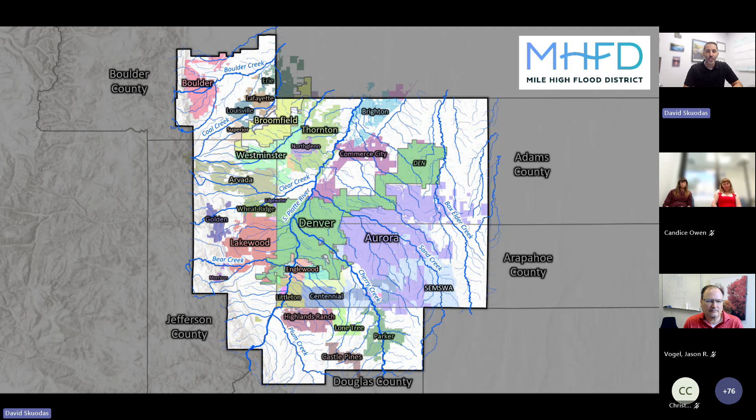A little more geography. The mountains limit urbanization to the west, but we have lots of land left to potentially urbanize in the east if we can find enough drinking water, which is not a certainty. We have some older parts of town too, areas built before we started planning around flood risk in the 1970s. So it's an interesting mixture of older at-risk neighborhoods, total greenfield development, and then everything in between. So that's who we are and where we are.

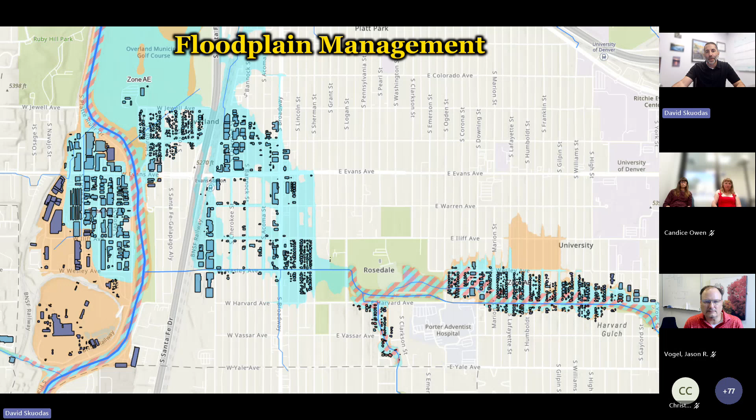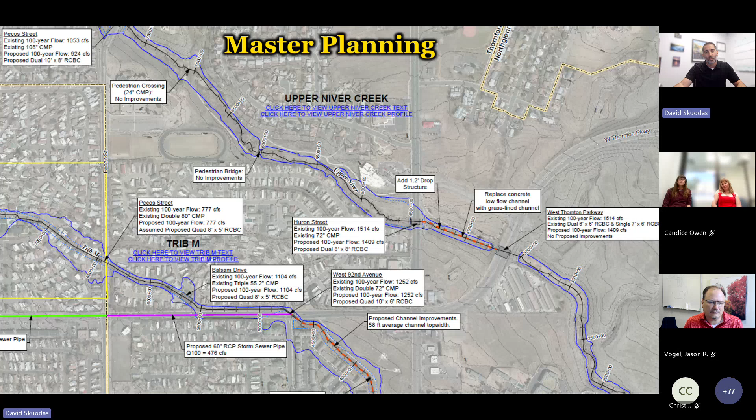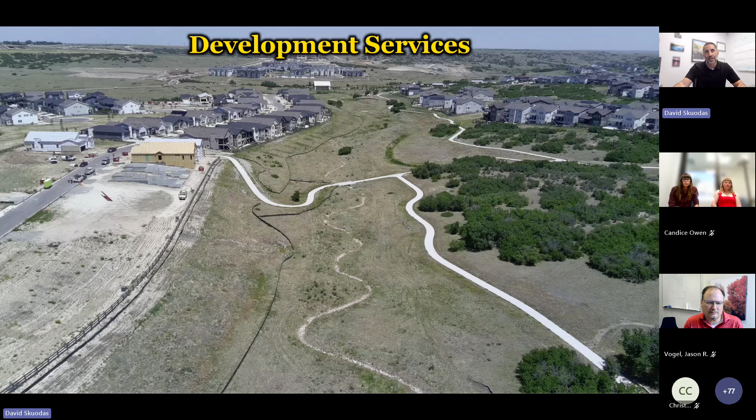I'll also describe our services. With floodplain management, we identify and communicate flood risk. We have what's called a cooperating technical partnership with FEMA that gives us local management of changes to floodplain maps. So we identify the risk, but then we need to know what can be done about it. With master planning, we study streams and watersheds to identify system-wide goals and potential improvements so that as both public and private projects get built, we know how it all works together. With development services, land development still builds more new waterway infrastructure than we do. So we play a big role in working with local government partners to preserve stream corridors and ensure that private dollars are building quality infrastructure that taxpayers will inherit. Capital improvements, this is where we fund, design, and build public infrastructure projects, typically for flood mitigation or stream restoration.

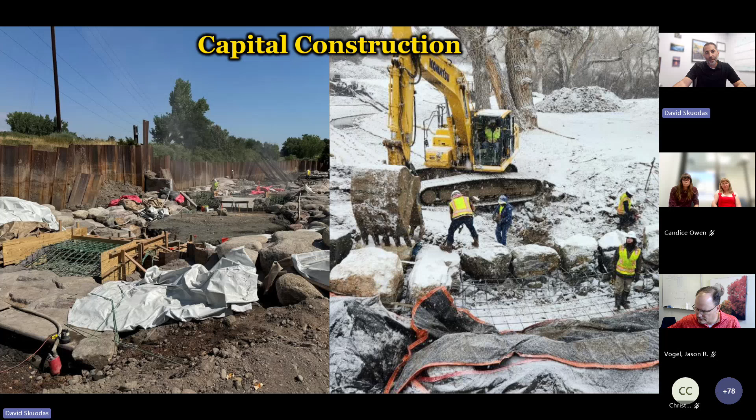Every project we build is in partnership with the local government. So we generally let them set the priorities, but we require that they fund at least 50% of the cost. Stream management is where we maintain and manage functionality of our systems on a yearly basis, including vegetation management, infrastructure repairs, and preserving flood carrying capacity. We do fund this work at 100%.

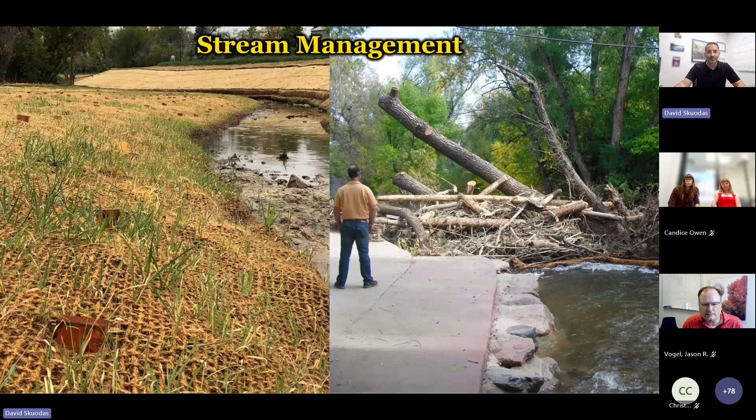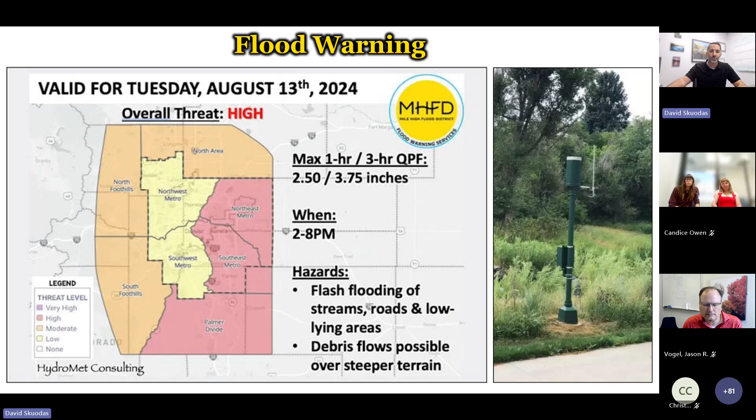We also purchase flood-prone properties in high-risk areas from willing sellers. We probably do around 3 or 4 of these per year. Flood warning includes daily forecasting and a network of rain and stream gauges to equip emergency managers with real-time information. So that green pipe on the right has a tipping bucket rain gauge at the top and then a flow gauge in the stream nearby, and it's all connected to a cellular network.

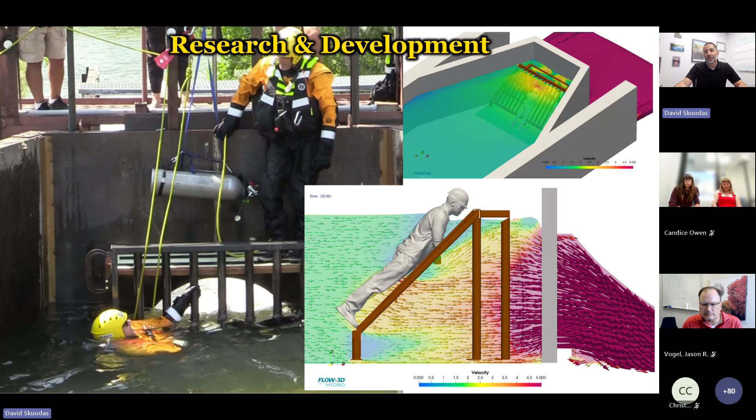With research and development, we create engineering criteria, tools, techniques, and standards for the industry. Here you're looking at research and testing related to safety grates that Holly will share more about later. Education and outreach. Here, our goal is to elevate our fellow industry professionals and inform the public and policymakers.

Now, when it comes to results we've been able to achieve, one of the ways I like to describe that is that our impact makes the community safer, healthier, and more livable. So let me give you a few examples, starting with safety. Now, Westerly Creek in Denver has an interesting history. This photo shows an engineered channel that used to sit under the runways of the old Stapleton Airport.

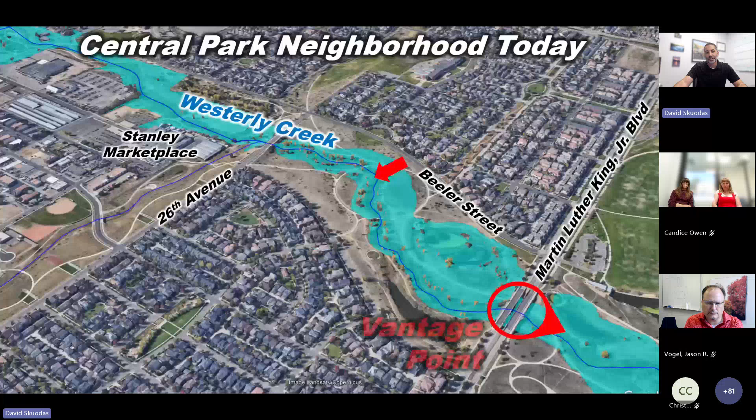As the area redeveloped, space was preserved for flood flows to spread out. So resilience was largely achieved with the design here with healthy vegetation and buried riprap. I like to call this infrastructure that looks like nature. Now, this used to be buried under a runway. Now I'm going to show you a series of photos taken from this bridge. Here you can see the photo vantage point a little better. That ped bridge in the distance will show up in all these photos.

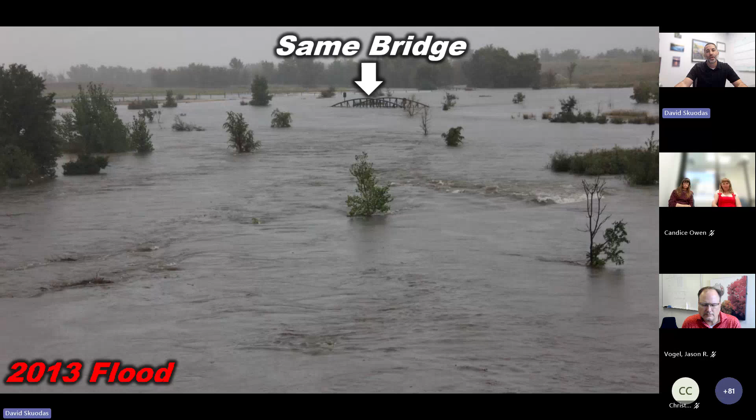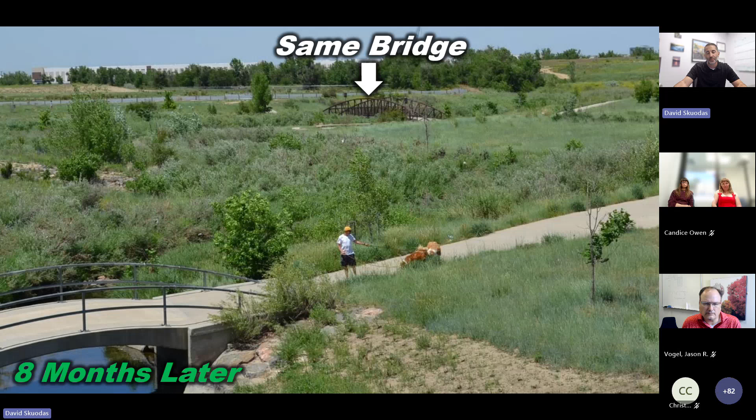So here's an initial photo on a sunny day. And here is the exact same view at the height of the 2013 flood when we had 100-year flows from 16 inches of rain. This photo was taken the very next day, and then back to the first photo, which was actually taken 8 months post-flood. So after a 100-year flood, there was literally nothing to fix here, and I think this demonstrates one of the ways we've made the community safer.

We also make the community healthier in a number of different ways through ecology, recreation, shade, access to nature, but I'll share a quick water quality story. We're not an MS4, but with our research and development group, we provide resources to help our MS4 partners. Candice will share some examples later. But sometimes the most impact you can have on water quality is in the receiving stream rather than in the watershed. And here we're looking at a restoration project on Cherry Creek.

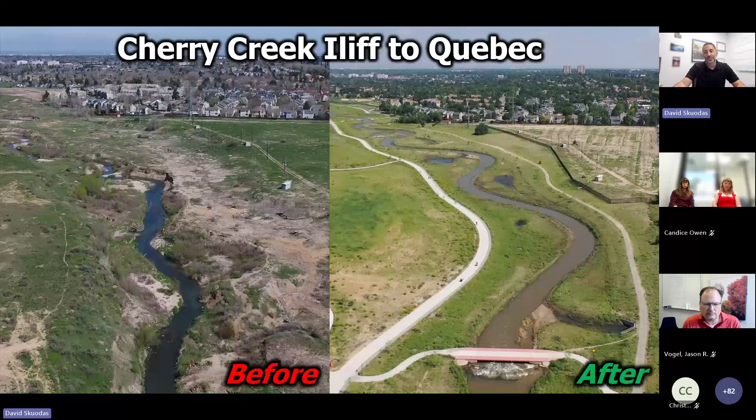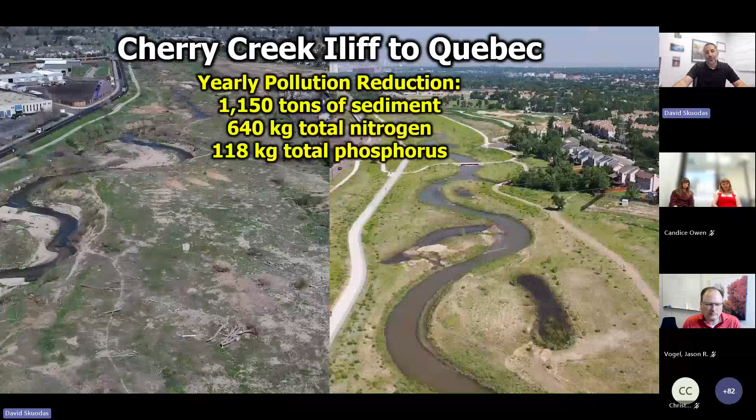This project was studied to quantify how much the stream restoration reduces pollution. So prior to the project, the stream was eroding like crazy and sending all sorts of sediment and pollutants downstream through the system. And this shows the list of contaminants that no longer make their way downstream on a yearly basis because of this restoration. So this is an example of one of the ways we make the community healthier.

So we take a lot of pride in creating projects that allow many functions to occupy the same space because it creates lasting benefits, both for the community and the environment. And we found it's possible to accomplish this layering of goals even at the end of a pipe outfall like this one, where we ran the daily flows through a series of constructed planters to have a cleansing effect on the water and also to serve as an amenity for trail users to stop and look at. And yes, it can handle a major flood really well, which we had to plan for also.

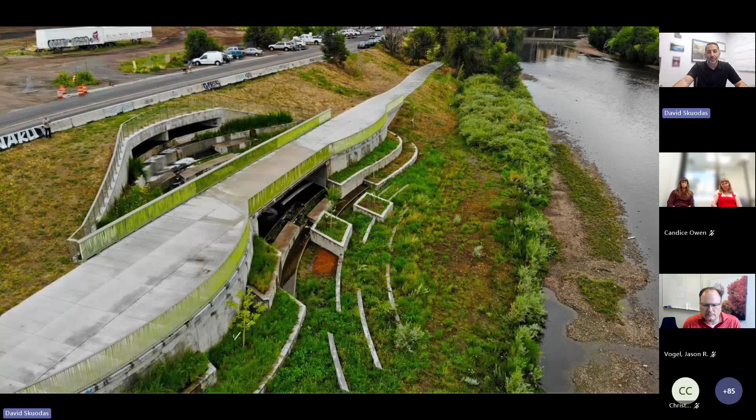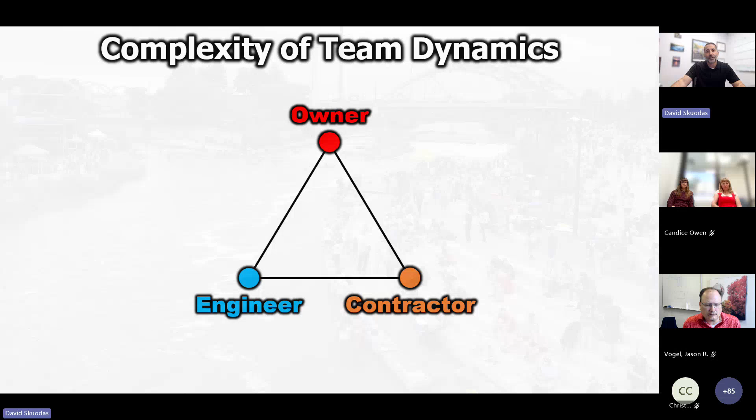This costs perhaps 10 to 20% more than a traditional outfall would have cost, but I think we would say it's definitely worth it. Now, projects like this one were created pretty much by an owner, an engineer, and a contractor working together. But when we expand our idea of what's possible and start thinking about placemaking and community values, habitat, recreation, the team gets more complicated. And this graphic is showing you how complicated just the project team can get. So we've done a few things over time to help us navigate that complexity. And one of those is the urban stream framework.

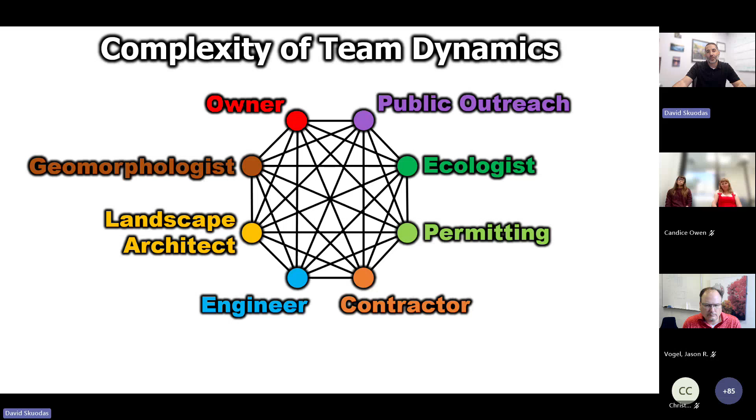So flood protection is largely driven by hydrology and hydraulics. These are foundational, but I think of them as the black and white aspects of our work. Not necessarily easy, but they're quantifiable and mathematical in ways that we're used to. So upon this black and white foundation, we also consider these other elements of urban stream function. We call these the 5 elements. So if H and H are black and white, then the other elements bring color. It's the browns, the greens, all the other colors of the rainbow. This combination takes projects from good to great. It makes them community treasures and not just utilities.

So when we're talking about multifunction, these elements are where we start, and then we balance them with capital and life cycle costs and the context we're working in. We don't consider any of these as nice to have. We feel responsible for finding the optimal combination for a given project.

And I don't have time to get into much detail, but we take the 5 elements, lay out common performance indicators, and then within each of these, we look at a wide array of quantifiable metrics to define how much value, how much function we might gain per dollar invested for alternatives we're considering. We come up with a project-specific constellation of success metrics to measure different versions of the same project against itself. So this helps us understand value in addition to flood protection and clean water. So our goal shouldn't be to build the cheapest projects possible. We're looking for that sweet spot between cost and value.

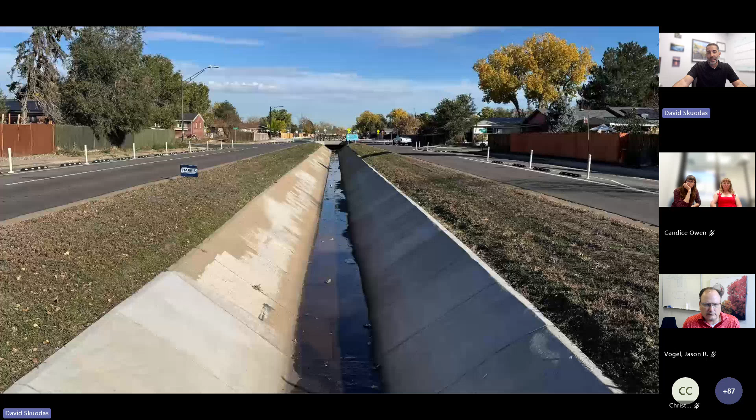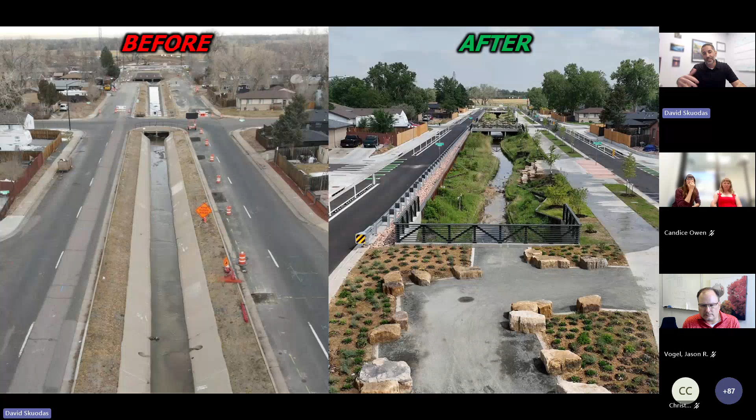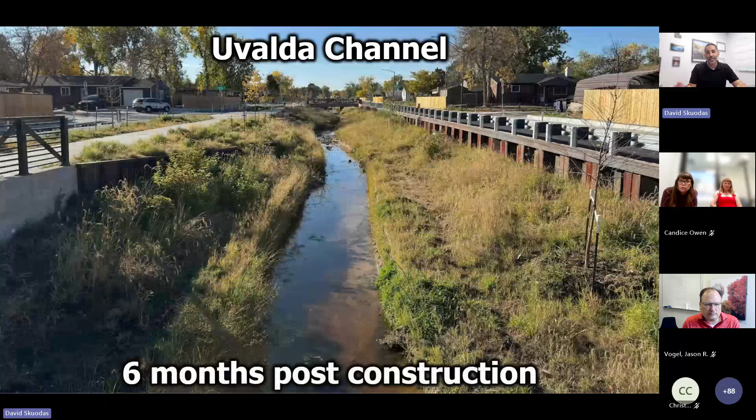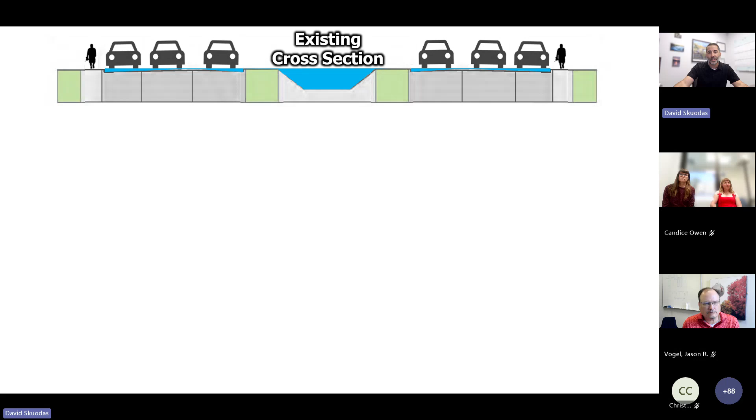This project was impacting a polygon of public land. There were many different choices about how we could reallocate that public space. The existing road section was very focused on cars, not much room for hydraulics, pedestrians, or cyclists. No habitat, no shade, and this shows it diagrammed in cross-section. So how can we make better use of the land we have to work with? So using the street to carry riverine flow was a non-starter because of the stranded car we saw earlier, so that gave us a starting point.

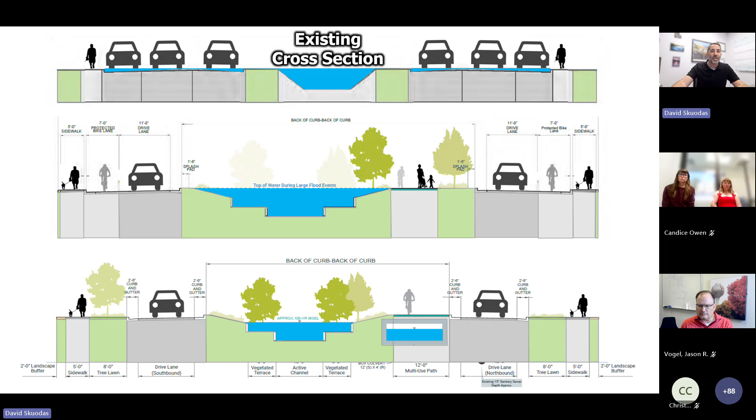Here were the 2 cross-section alternatives we narrowed it down to from 16 we considered. We compared the functional performance for each of these functions like hydraulics and ecology, pedestrians, bikes, moving cars, parked cars, tree canopy. The bottom option puts some of the major conveyance underground. So the costs were similar, so we chose the middle option. This excerpt shows a high-level depiction of the candy buttons we used to compare different options we were choosing from.

There was extensive community engagement to get their input, so we included the public.

I got just about a minute or two and I'll be wrapping up.

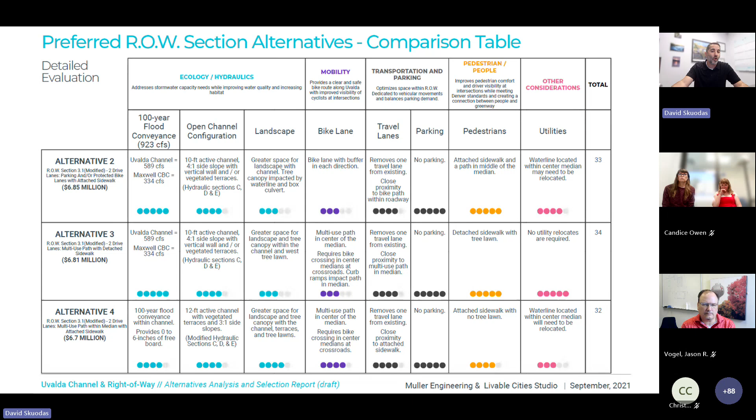A public space being great will be judged in the eyes of the public who live near it. So we want this outdoor space to feel like home to them. So that means they needed to feel like they were part of the process. So notice how conveyance was just one of several diverse variables we considered.

And the design project manager on this is a guy I admire greatly. And he said this project achieved the best balance of any project he'd ever worked on. And it was a balancing of value. Now, bringing a multidisciplinary group of people together to figure out a project like this was really challenging. It's very messy. It's very human.

So a couple of programs we've invested in include a stream management academy and a construction management academy. With the Stream Management Academy, this is a cohort-based program that brings a diverse group of industry professionals together to learn about the urban stream framework. But this is not just a stream restoration course.

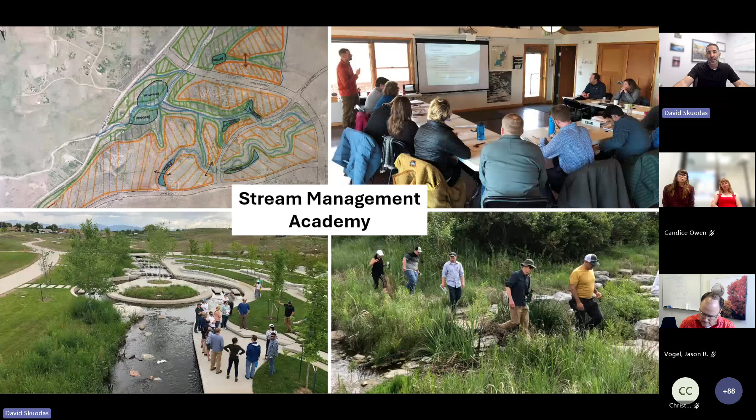It gets beyond that to help professionals understand relationships between watersheds, urban growth, infrastructure, ecology, and community priorities so they can make better decisions across the entire watershed, regardless of their role. The 5 elements form the basis of class material. The academy is fully in person and meets 6 times, with half the sessions in the classroom and the other half out in the field.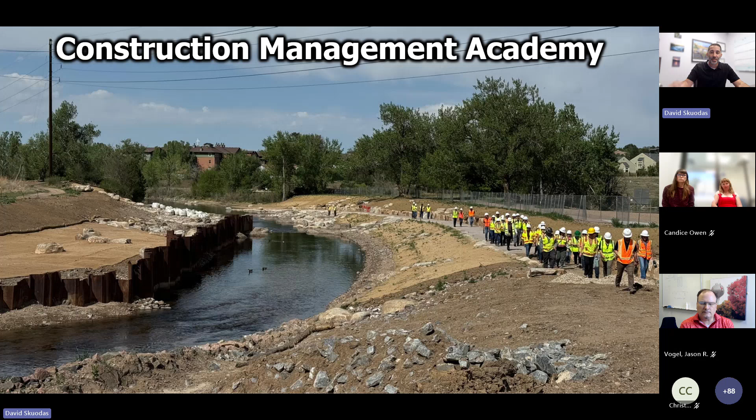With the Construction Management Academy, this provides more one-off field experiences for designers, inspectors, and project managers to introduce them to waterway-specific construction materials and techniques. Sometimes it involves construction site visits like you see here. We also create hands-on opportunities where we can. One example is with void fill riprap, which is on the right image here.

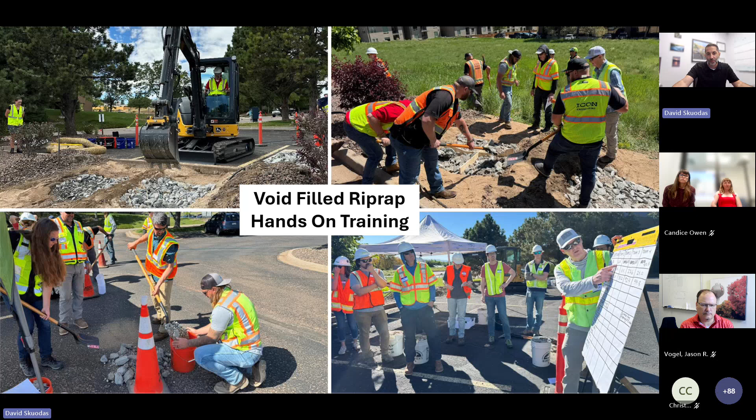I bring this one up because it's hugely beneficial in helping us create solutions that work better with nature. But it's really finicky because all the materials that get brought to the site are very inconsistent. So we created a scaled down version where the students mix and place the material by hand so they experience what can be challenging about void fill riprap. It takes a lot of field judgment.

It was very popular. And then we also produce educational construction videos that get posted to our YouTube page, which you see here. Our riprap video is our most popular. It's been viewed about 75,000 times. So that's a little bit about the Mile High Flood District, our services, and some of our educational offerings.

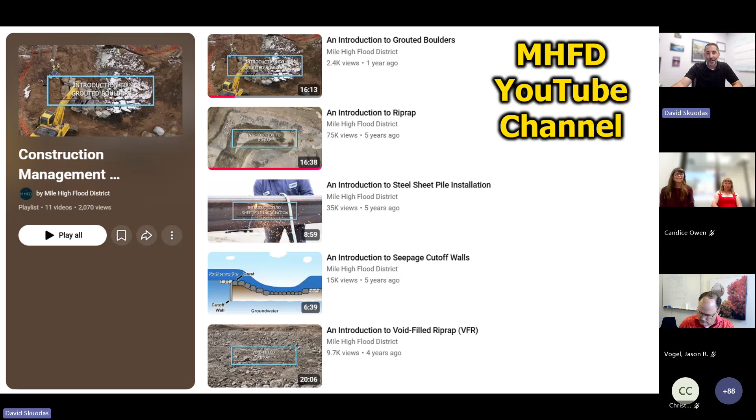I'm going to flip this over to Holly now. We're going to play a little musical chairs. It's here. Okay, you should get.

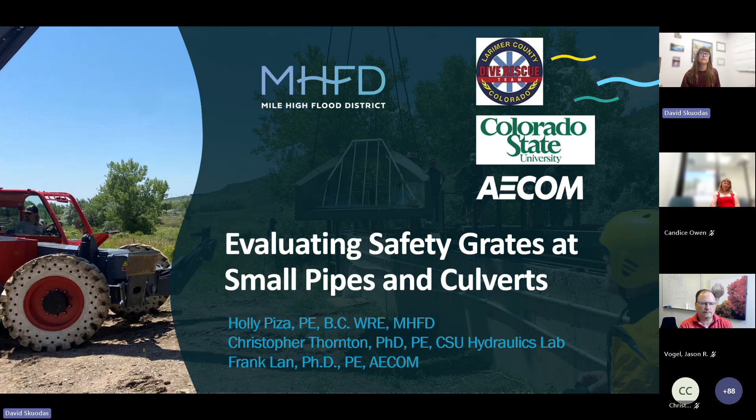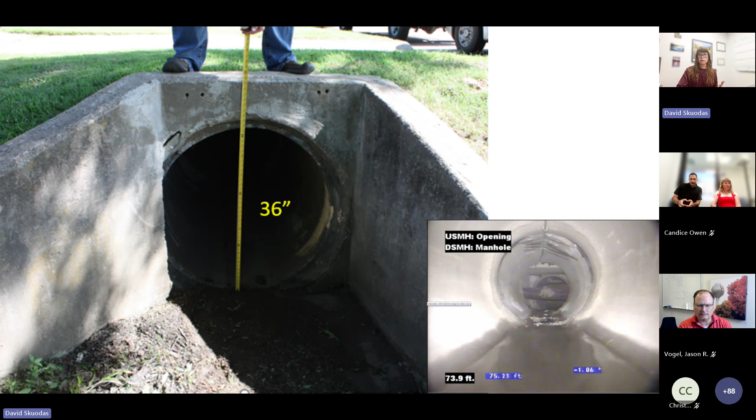Unfortunately, it was a long culvert with a utility cut through the pipe, which is not uncommon. And someone lost their life here. And so these are some of the dangers that we have in our watersheds on any given flooded day. ProPublica put some light on this a while back and said that we as government agencies have failed to take simple steps to prevent these tragedies from happening.

So the first part of this project was that we looked at 41 different incidents from the 90s to the 2020s. This was step one: identify the configurations and settings where people get hurt and how they get hurt.

Then we were able to partner with Colorado State, who built a physical model around this, so that once we know where to install them, we'd know how to design them.

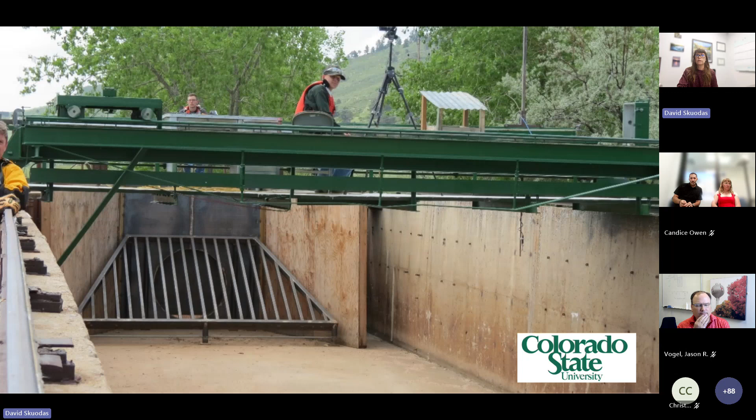We made lots of measurements in the Flume, looking at velocity at different points in the grate, before we partnered with the Larimer County Dive Rescue Team, who was excited to get in the water and give us qualitative data on what different flows felt like and what design configuration was easiest to navigate and self-rescue, or help someone rescue, which is the role they often have.

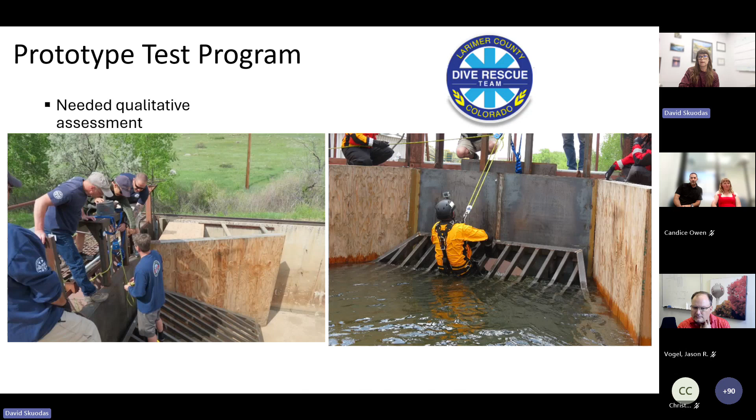The team was great. At one point they convinced me to get into the Flume to see what it felt like, and it felt too safe in this configuration. We hadn't found that threshold condition that made it too difficult to self-rescue.

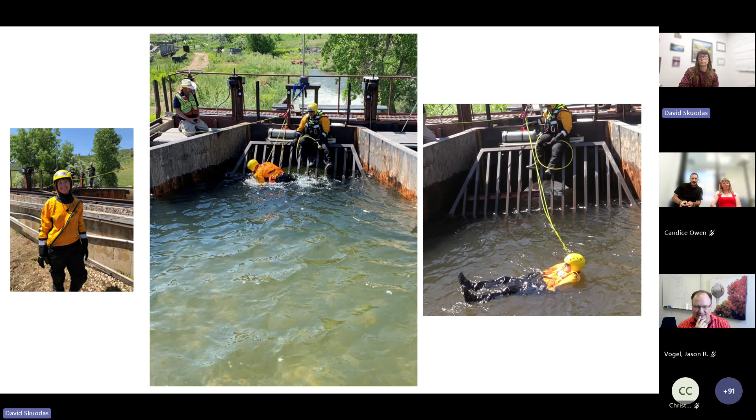So we changed it up, went to a vertical grate with an offset from the orifice, just to get the team closer to that suction force of the orifice of the culvert or pipe. We're looking for the force on a person that might pin them to the grate or suck them into a pipe if the grate wasn't there.

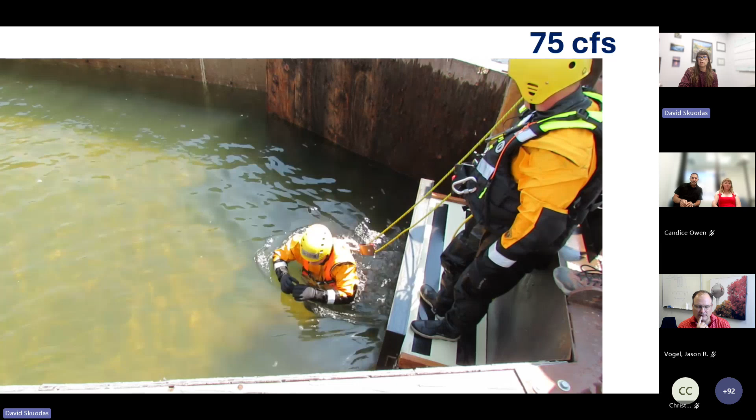So at 75 CFS in this configuration, you can see that our diver is able to walk in front of it and not lose his footing.

Turned it up to 90 CFS. He noted that there was a dramatic difference. He said, quote, 'It's hard, it's not easy for me.'

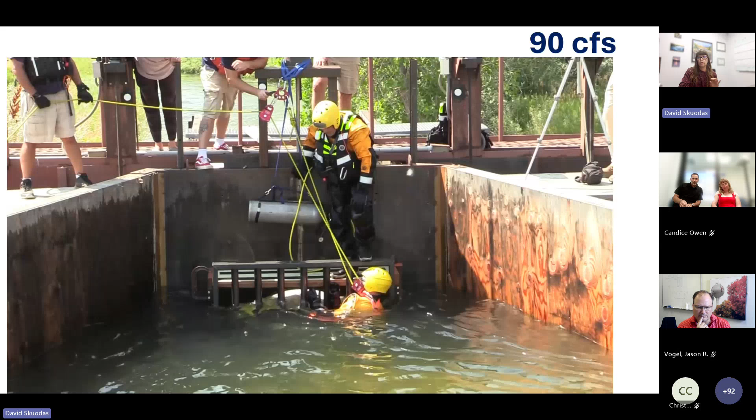So now we know that between these two conditions, we've crossed that threshold force on the diver, at which someone might become pinned, unable to self-rescue.

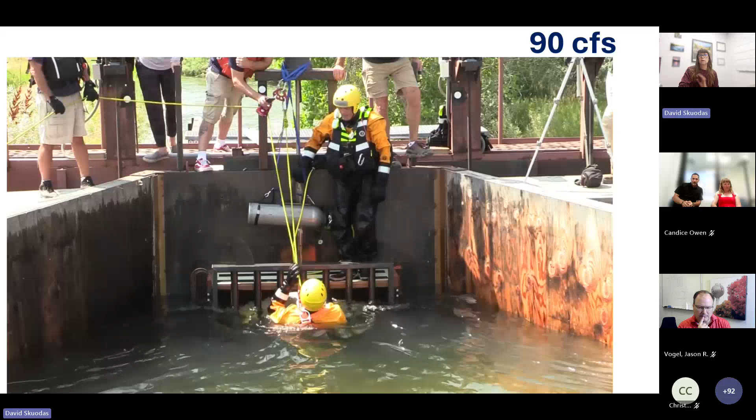Then we partnered with AECOM to recreate these conditions in a 3D CFD model. This would also later enable us to expand to more configurations that we weren't able to do in the physical model.

In the physical model, we looked at 2 different pipe sizes. In the 3D model, we were able to look at everything from 12 inches to 60.

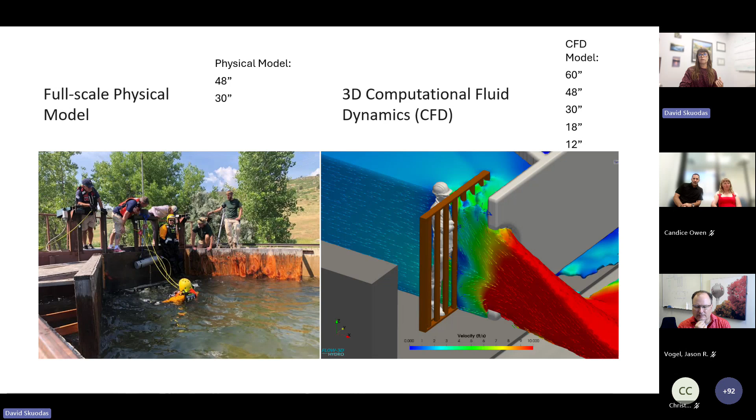We did some work to make sure we had agreement between the physical model and the 3D model, comparing measurements from both, and we were able to find agreement.

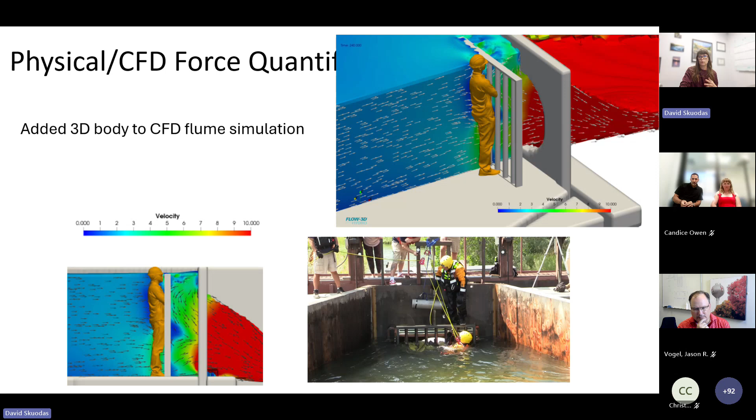Then we added a 3D person to the model to determine the force on that person for configurations we created in the Flume, specifically the force above and below the threshold force we found at those different configurations I showed you. So this is what it looked like.

At that 75 CFS, we had a force of 107 pounds. And at 90, we had a force of 142.

And given that this was a full-size man in the Flume, we wanted to be a little bit conservative, and we went with...

This was really a significant finding of our research: that 110 pounds of force is the threshold at which you may get pinned against a grate, not able to self-rescue, or you might get sucked into a pipe.

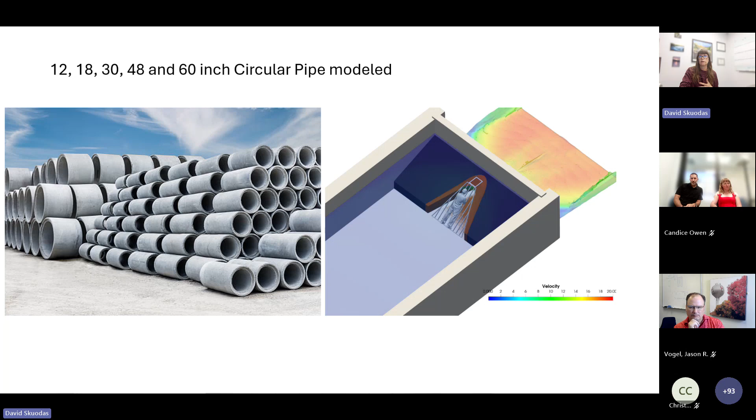So now we know the threshold force. We can use modeling to better understand different configurations. We added a child-sized dummy into the 3D model for smaller pipe sizes.

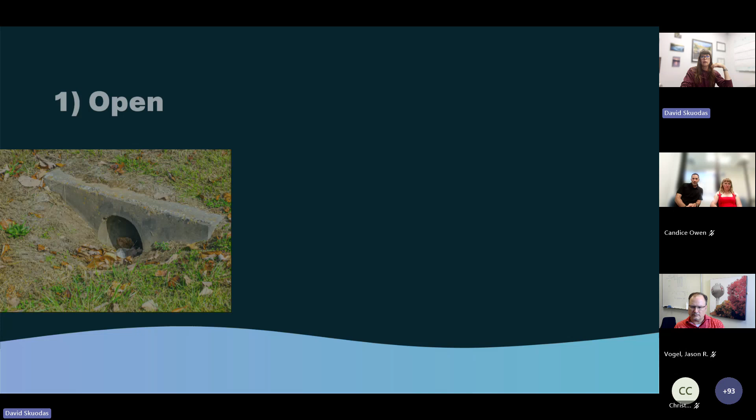Then we wanted to translate this to criteria, so we focused on 3 different common configurations. Number 1, open pipe — when do you not need a grate? Number 2, flared end section with an off-the-shelf grate. And number 3, a custom grate.

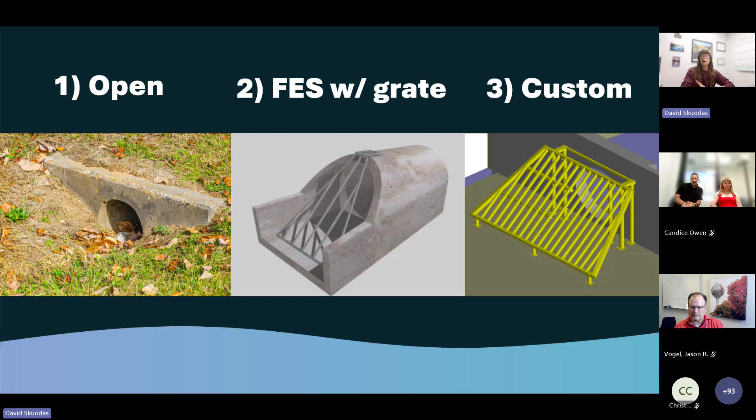Looking at the unprotected pipe configuration, that first configuration, we saw that discharges below 20 CFS didn't produce a force on a body more than that threshold force.

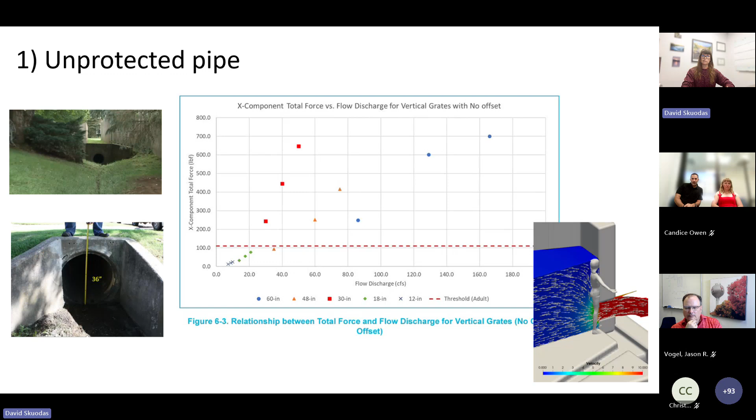But what if you've got really high headwater and you're restricting flow to 20 CFS? Maybe you're using the pipe to restrict flow and detain water upstream — that could be a very dangerous consideration.

Headwater over diameter is a typical parameter engineers consider. We don't typically have force, right? But we do this calculation.

In our criteria, we've always had additional requirements for pipe inlets when this exceeds 1.5. We say you need a headwall so that you don't have piping through the embankment. It's a threshold for other requirements.

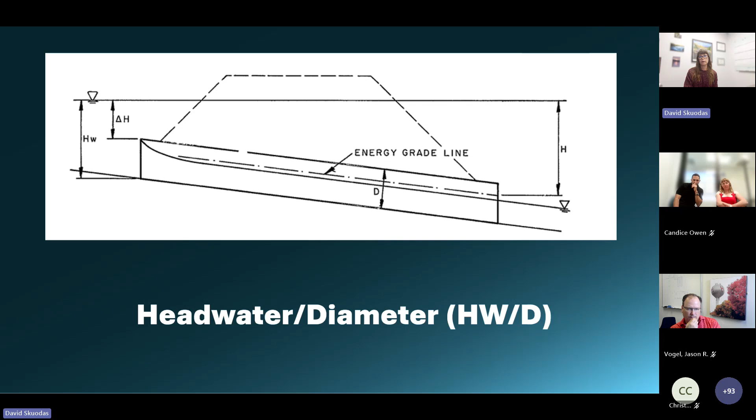And when we looked at that within this study, we found that this 1.5 value was also a good breaking point for evaluating safety grate design.

Okay, so let's look at that second configuration, the flared end section. For the larger pipes in this study, 48 inches and 60 inches, the threshold force was typically exceeded for this entrance configuration when discharge was more than 100 CFS.

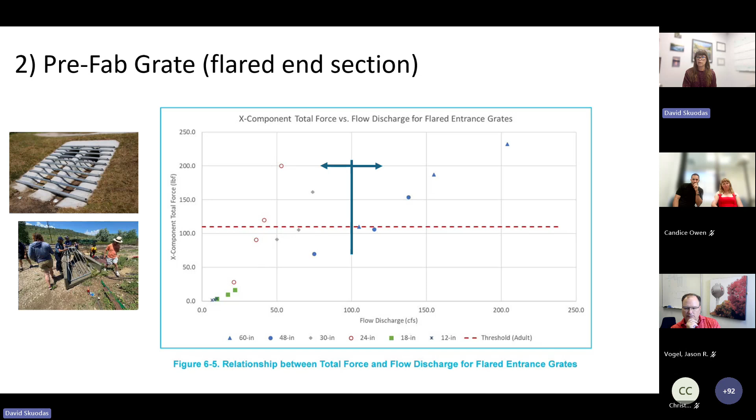For all pipe sizes below that, the threshold force can be exceeded when headwater over diameter exceeds a value of 1.5. This means that for typical flared-end section designs, a prefabricated grate will be sufficient for flows under 100 CFS and with that headwater over diameter under a value of 1.5.

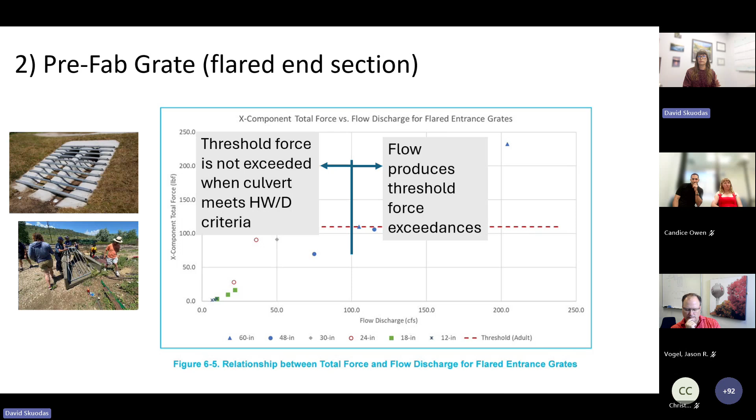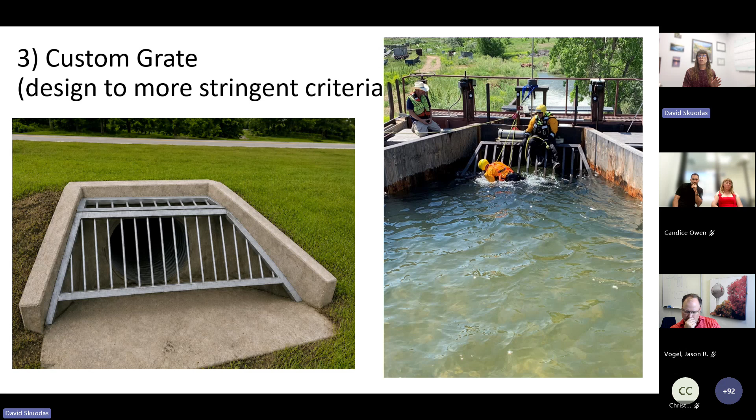And then that third configuration, the custom grate, when the design can't meet the conditions equivalent to the first two configurations, we found that the custom grate was always suitable for all other flow conditions tested up to 300 CFS.

This is just a summary slide showing the criteria we put into our manual. For those smaller uncovered grates, they're good as long as it's under 20 CFS and you're within the 1.5 headwater over diameter criteria. You can go to a flared end section with an off-the-shelf grate as long as you're within that 1.5 criteria and less than 100 CFS. Then between 100 CFS and 300, you can use the custom grate.

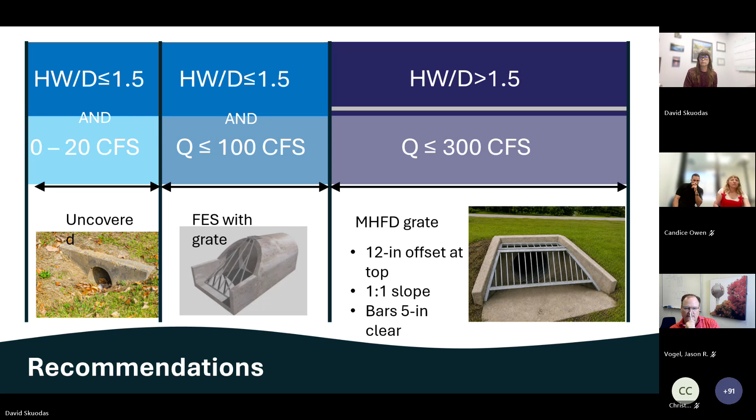And that criteria has been incorporated into our manual. It's volume 2. We also have a technical memorandum that we've published on our website, along with AECOM's report and Colorado State University's report.

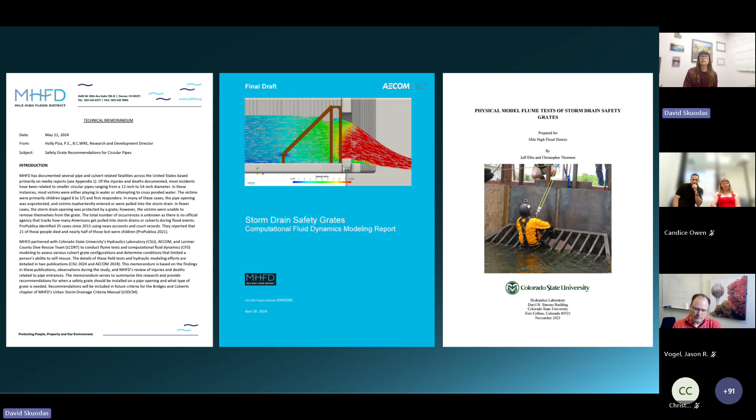We've done a couple of things with this, including work with some local students so that resident scientists can come in and provide information on where these are located, and we can address them. And that's a bit about that project.

And Candice has a couple more that she's going to highlight specific to stormwater quality. Thanks, Holly. Great. All right. Hi, folks.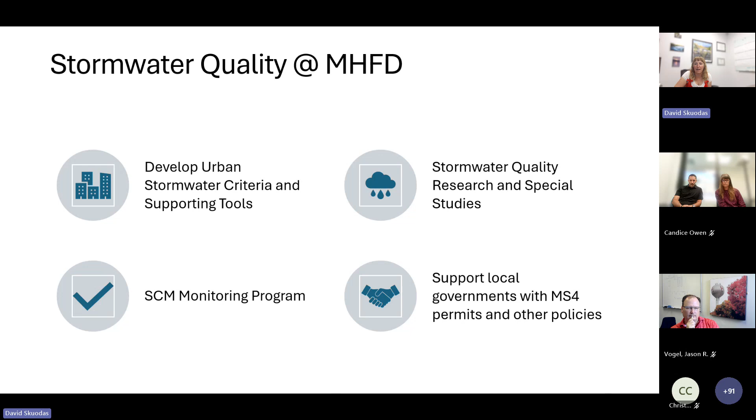Today, I'm going to be highlighting work of our stormwater quality program, and these are our main focus areas. We update criteria that Holly was just talking about. We have 3 volumes, and we develop tools to support that, including design workbooks and other types of software. We conduct various types of research and special studies, like the street sweeping study you're going to hear about. I'm also going to hit on our SCM monitoring program. And finally, we support our local governments with policy and regulatory issues, and we advocate and influence requirements and permits that are hopefully rooted in science and engineering.

So I'm going to jump into some specifics here, starting with our regional street sweeping study. This study first came up through conversations with our local governments and state regulators, and this bubbled up as a good research project ahead of Colorado's general Phase 2 MS4 permit update. Both of these next two efforts were done in collaboration with Jane Clary at Wright Water Engineers here in Denver, so a shout out to her.

Goals of this project: we wanted to allow our local governments to take credit for the street sweeping programs they're implementing. We also wanted to understand best practices that could be shared for better street sweeping programs. So we wanted to answer the question: how can we quantify and credit the nutrient reduction benefits of street sweeping in Colorado? And we developed this study.

We wanted it to be slightly iterative. So we wanted our literature review and local government understanding of what they were doing to inform our Phase 2 of field data collection and understanding the tool we wanted to develop. We knew we wanted a calculator tool to quantify, and we just needed to determine if we needed something new or could reuse and piggyback off of great existing research being done nationally. So we did that, and right now we're in Phase 3 trying to finalize the tool and the report.

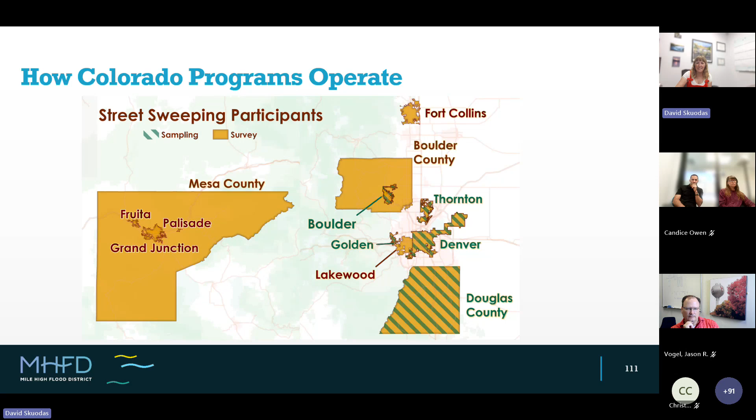All jurisdictions do spring street sweeping primarily to remove winter sanding materials from snow. Nearly all had dedicated fall sweeping or leaf management activities to get that up before winter came. Most programs track collected materials by volume, such as cubic yards, rather than by weight. Curb miles swept were attractive because they were already relatively easy to report, but we weren't really sure that curb miles could reliably predict pollutant removal. There were other variables we collected, but nothing really of note. The biggest lesson was that we needed the calculation method to meet the programs where they were at. Most programs can track curb miles and estimate hopper volumes, but far fewer actually weigh the material.

What we were really trying to do is characterize the amount of sediment and sweeper waste that would be most readily transported to receiving waters, and how much mass of phosphorus was in that. We know the material in the hopper has been removed from the street, but the harder question is how much of that material would otherwise have gotten to the receiving water as a phosphorus load. Perspectives on the water quality benefits of street sweeping range quite a bit, from giving a lot of credit because material has been picked up, to not giving much credit based on what is actually making it to the waterway.

Based on a literature review and current thinking, we felt that basing credit on fine sediment below 250 microns was a reasonable threshold. But there's also leaf litter, which complicates that framework because larger organic matter can move in runoff and release dissolved phosphorus. So we needed both a practical accounting method and enough regional data to really characterize this.

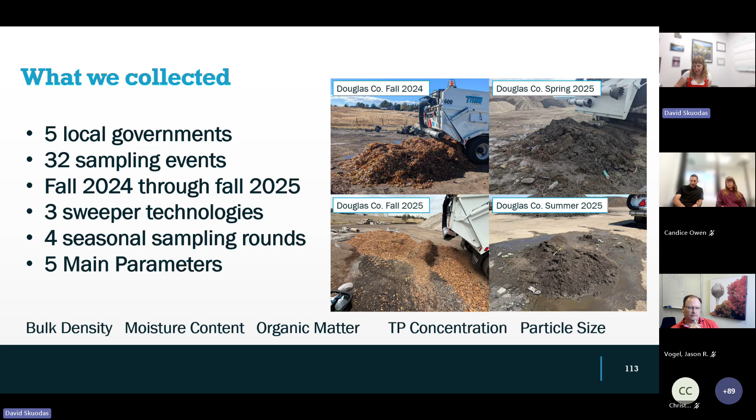We also found that only about 10% of the collected mass fit into that suspended size fraction, the 250 microns. But in the fall, 57% of phosphorus mass was associated with those larger particle sizes, likely the leaf litter. So once results were divided by season and sweeper technologies, sample sizes were just too small to draw strong conclusions about comparative sweeper performance, which we were a little bit bummed about.

This finding was important to the study process. It moved us away from developing a simple regional curb mile factor and towards a mass-based approach using seasonal measurements. If local governments don't directly measure mass, programs can estimate mass from collected volume using a seasonally appropriate bulk density, which is what we were studying. This conclusion really narrowed the search to existing tools that use wet or dry mass and differentiate leaf fall from non-leaf fall conditions.

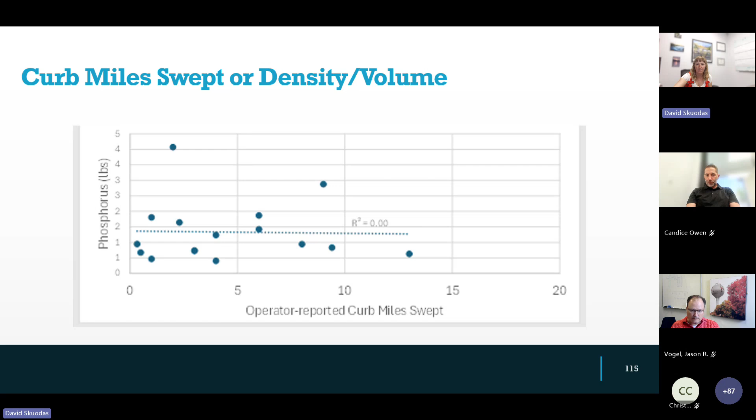In the search for a tool that might fit our data, the literature review looked at Minnesota, New Hampshire, Chesapeake Bay, and some others. We had originally considered developing a new Colorado tool, but after reviewing program operations and looking at the data, the team decided that actually adapting an existing tool would be a good option.

We went with the Minnesota Pollution Control Agency calculator. We selected this because it uses wet or dry mass rather than relying on curb miles swept. It distinguishes fall leaf litter from non-fall collection. It's based on empirical data, and it uses the 25th quantile phosphorus concentration, which is a conservative basis for estimating phosphorus removal. So some assumptions transferred well, others didn't.

A couple of things we could guess: phosphorus concentrations were lower in our samples, as well as our samples were much drier. So that was helpful to let us know that we needed to apply our own data, as you can see there, for the calculator.

We're really excited to wrap this up. We've got a final draft and have this be a resource for our local governments as we continue to navigate the regulatory aspects of nutrient TMDLs here in Colorado.

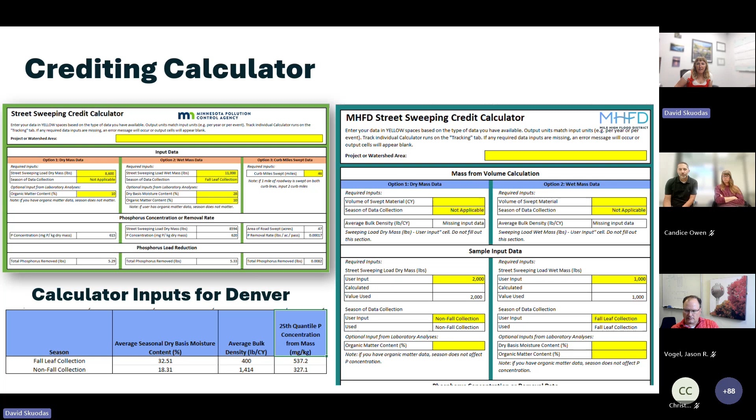Some takeaways based on this Colorado study and the broader literature: empirical evidence indicates that street sweeping can be not only a good housekeeping practice, but it really can be a way to reduce phosphorus loads in watersheds concerned about TMDLs. We believe even more refinement might be conducted by our local governments with more detailed data collection to maybe get to that curb mile swept parameter, but we just weren't able to do that in this study.

Some of the national tools, I guess this is the biggest point, can actually be transferable to other regions with regionally specific data collection. So you really don't have to reinvent the wheel, which was pretty cool.

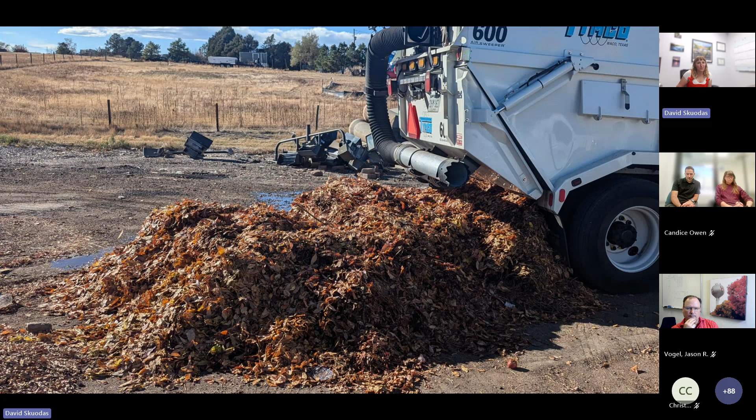So I'm going to switch gears here. We've also recently completed the Colorado E. coli Toolbox. This was another project fueled primarily by supporting local governments around the general phase 2 permit update. We knew the state was planning to include a number of additional E. coli TMDL requirements and really wanted to get ahead of influencing what those requirements might be by exploring changes in the state of science and practice over the last 10 years around E. coli.

What we continue to recognize, after a number of entities in Colorado have been working on this problem for over 20 years, is that there really are no easy answers, and focusing on controllable sources is the most pragmatic path. You can work really hard on this and still have exceedances in stream, which is just kind of challenging. So we really tried to hit on practical tips in this toolbox and national information.

We're really excited about it. Just want to go through a few things that were updated or that we found. We gathered a ton of new information. We also found that a lot of the fundamentals had stayed the same, such as focusing on finding and mitigating sources of E. coli.

We also found that some of the paths that were really up and coming, like some of the modeling, had been found to not be particularly helpful over the last 10 years, and so new techniques are now being explored. In terms of developing a strategy, a lot of the general themes and best practices really hadn't changed: address dry weather first, address human sources, do non-structural first, that sort of thing.

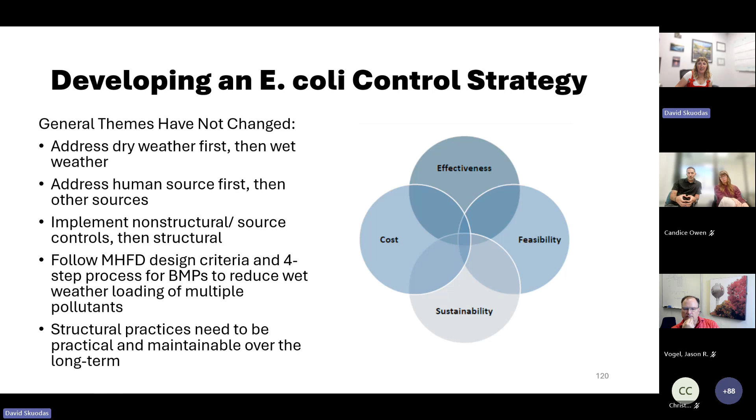One update to the toolbox I wanted to highlight specifically is guidance to support program development at various stages of maturity. This is something we identified when talking with our local governments and thinking about what permit requirements would be most helpful. That really depends on where the program was in the process of understanding the issue.

Getting started means understanding the problem and understanding things like who needs to be involved and your system and outfalls. A mid-program starts to consider what are our sources and how can we abate them, and consider systematic sewershed prioritization and investigation. Then a mature program is really going to get into adaptive management: we've explored our system and our sewershed, now we're going to do projects and then come back and study again.

In terms of identifying sources, we were still on track with information previously in the toolbox, but advancements included things like risk-based thresholds for the human HF183 marker, which I thought was super helpful. We get these numbers back in concentration form, and then we want to ask, what are these numbers telling us? What thresholds are concerning? When are these numbers bad?

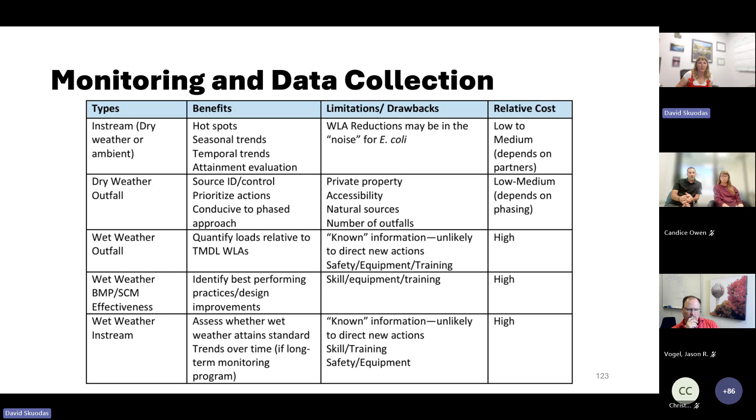There's some guidance in there that I think is a really great tool and guidelines. Additionally, this table has been extremely helpful in conversations with the state about whether wet weather monitoring is valuable. Essentially, this supports the theme throughout the toolbox that the priority should be on identifying and mitigating sources. Wet weather is a challenging condition to try to look for sources; the concentrations are usually really high across the board.

We also present some innovative tools from various communities in Colorado and around the country. Denver's internal dashboard, where they have placed all of their E. coli program information as layers, was really innovative. They include information such as MST results, animal sightings, land use, inspection results, sanitary crossing points. This really allows them to paint the picture of fecal contamination in their system and make more informed decisions.

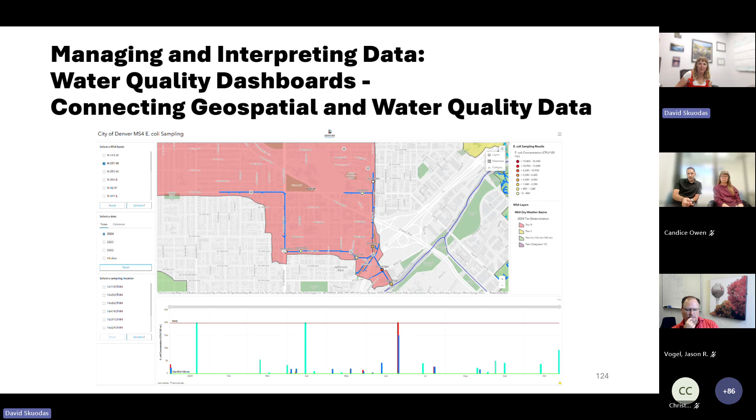We also present examples of ways local governments are communicating risk and best practices to the public and recreators in these natural waterways. Some are even posting red or green signs around different waterways. Additionally, an emerging tool to communicate real-time risk to recreators is being piloted by the City of Boulder. I think the City of Chicago was one of the original folks doing this, using real-time sensor technology that measures a surrogate substance in stream. These sensors are around $1,000 each, and they're beginning to be correlated with E. coli concentrations, giving more of a real-time understanding of potential contamination.

So this is just a wealth of tools and information. I really encourage folks to check out the toolbox that's up on our website now.

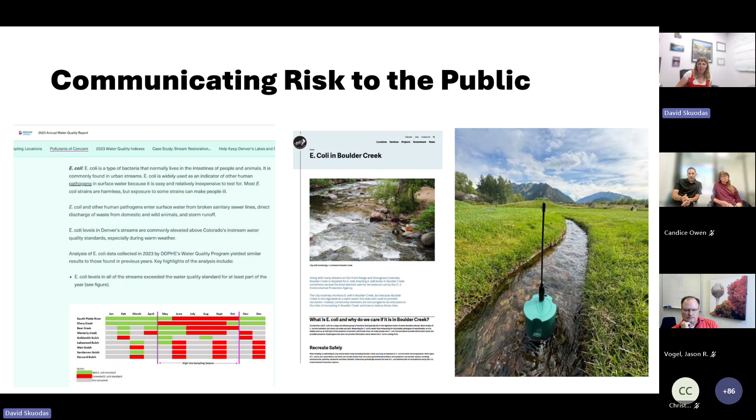Finally, I want to jump really quickly into our stormwater control measure monitoring program. We've been conducting this research on facilities for a number of years, and we feel it's really important to do local applied research to understand how systems laid out in our criteria are performing in the wild and how we can improve criteria for designing with maintenance in mind. So we conduct various types of research, from internal sites to more summary regional projects, to partnering with local governments and academia. We do this so we can use data to translate it into knowledge and ultimately wisdom that informs designs that are higher functioning, easy to maintain, and support our community values.

So just want to run through a couple of sites here. Our 21st and Iris bioretention site: we've learned how a system can change over the course of a number of years, from vegetation to soil composition. We've incorporated a number of things into our criteria, like the value of a sediment pad and formal forebay. Media with compost and shredded paper exports nitrogen, so we made some modifications to our media guidelines.

Internal water storage zones can reduce nutrients by promoting more infiltration and increasing contact time. We've included an internal water storage zone in our criteria, and just a number of other lessons learned, including lessons around monitoring specifically.

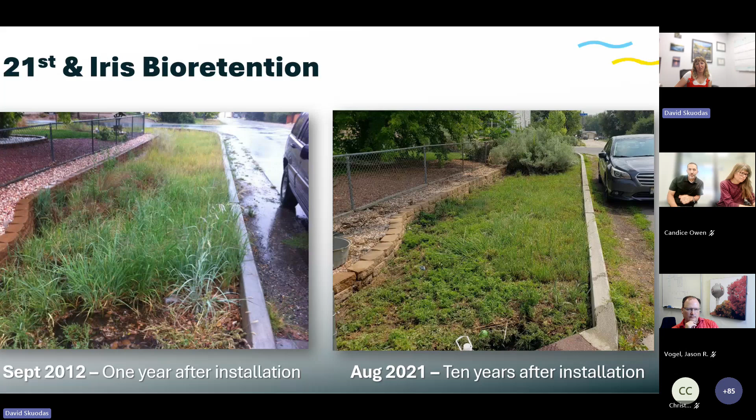Next, our River Run Park bioretention site—it's got a name from Game of Thrones, so it must be a pretty cool site. This is the partial infiltration bioretention with an underdrain. Here we learned that spreading out flow along the length of the system would have been more advantageous to treat, and not overloading the beginning portion of the system. We just got a ton of sediment in that front portion, and therefore weeds. The forebay at the site was undersized and allowed too much sediment into that front area, clogging the media. It's also hard to access to maintain, and it's challenging from a monitoring standpoint because we don't get outflow, since it's such a well-performing system. So a good example in one way, but we're not getting the outflow data in another.

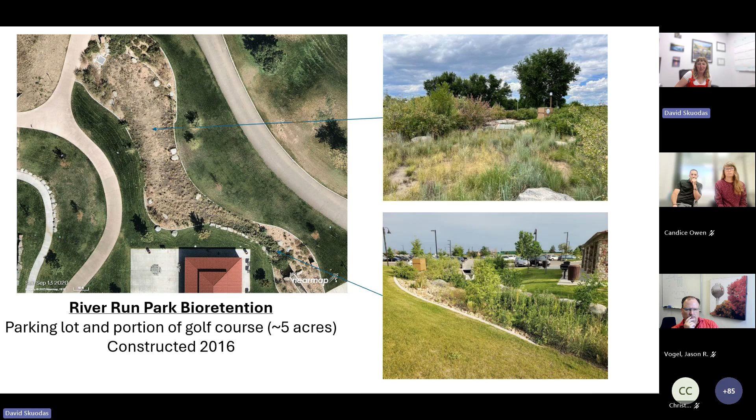Moving on, finally, I want to highlight our MHFD campus updates. We're currently engaging in a project to update landscape and exterior areas of our campus. Dave Skuodas is actually leading that project for us. Our vision is to really make this a learning and research space, from stormwater to vegetation. We're working closely with a design engineer and landscape architect, and also the Denver Botanic Gardens, to develop stormwater control measures and vegetation that will be monitored. Some facilities will also be more of a demonstration of aesthetics and best design.

And we want these spaces to provide training opportunities that folks can go out and learn from. Also considering what we might want to change over time and control, and we're including that in these designs. So it's just been really fun to inform that. And we anticipate going to construction in early 2027. Yeah, and so that is what I have.

Dave, do you want to? Okay, here we go. Yeah, no, it's great. We'll do any questions. It looks like there's one I answered in the chat. Looks like there's one that I'll defer to Holly or Candice to answer that's in the chat. I'm not sure if we can see it.

For bioswales, how consistently do communities perform maintenance, and what are the typical costs incurred in upkeep for smaller communities? And what does it look like? Additional staff to maintain landscaping? Question mark.

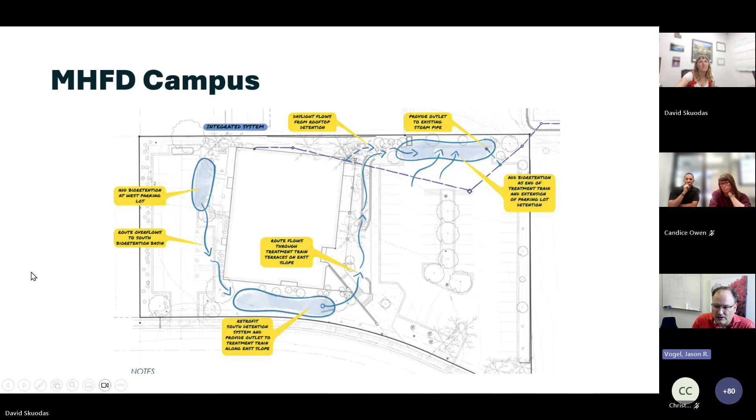And so for the Cherry Creek example, the construction cost was 10 million. The consultant cost was around 2 million for both design and construction management, within which we paid around 150,000 for the CLOMR and LOMR combined. Did not achieve mitigation credits for the project that could be applied elsewhere, but are looking towards that goal on another project, specifically for stream mitigation credits, but not wetland mitigation. So just getting that out there.

And thank you. I'm assuming that was David and not Candice that typed that while she was talking. I'm not that talented. That would have been impressive.

We have additional questions. What were the main drivers on the Cherry Creek project if it didn't receive stream mitigation credits? Does Colorado have separate point source stormwater credits versus non-point source mitigation credits?

So that project was driven by a desire for stream restoration. That was an area where the floodplain was pretty contained on the site already, but the stream was eroding like crazy and starting to threaten the trail and threaten adjacent roads. Water quality improvements weren't a catalyst for the project, but in designing the project to use a more nature-based design, if you will, more vegetated approaches. There's a lot of buried riprap along there. It was kind of during the project where somebody figured out it was a good idea to study how much of a water quality benefit the project created, that was analyzed by Wright Water Engineers.